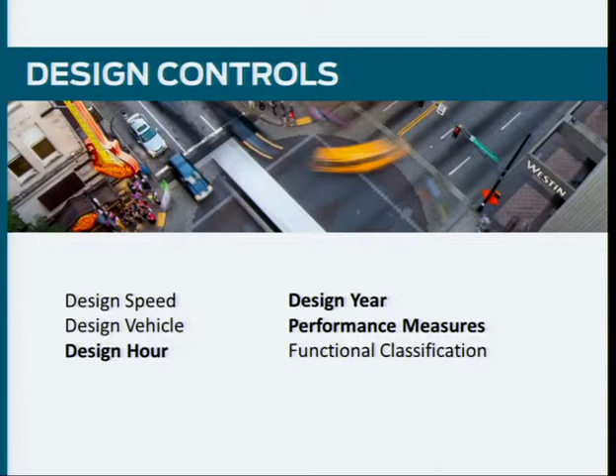Can you say that in cities? Why can't you say that in cities? There's a lot of various things—there's more obstacles, as the Green Book would say. Obstacles being trees, things that are in the way of that design vehicle. So clearly, from a speed standpoint, our needs in cities are much different than what you have in a rural or much more rural condition.

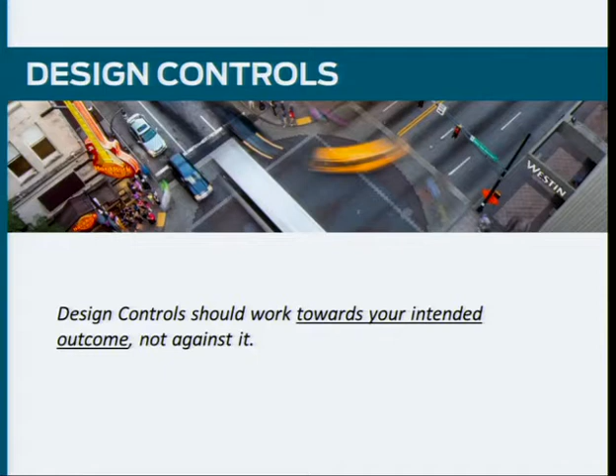The first point I want to make is design controls should work towards your intended outcome, not against it. If you think about it from a city standpoint, what's our number one goal in downtown Portland? It's to make it as friendly as possible to pedestrians. But above that, we want housing in downtown Portland—we want people to live and work there. So thinking about the nature of our streets, we don't want people to speed through them. We want our design controls to contribute to a safe environment for pedestrians and everybody downtown.

High-quality design for city streets and intersections relies on a keen understanding of the analytical processes and assumptions underlying those technical decisions that shape our streets. Some of you will know this answer, but what speed do we assume people drive in downtown Portland? It seems like a good speed—how fast can you drive in downtown Portland? For those of you who took my summer class, you can't answer. 12 miles an hour? Okay, that's close.

We're actually at 13 to 16 miles an hour in downtown Portland. How do we do that? It's because of the short space between intersections, and we've chosen that speed to make it as safe as possible. If we do have a crash, we want that crash to have as small an impact as possible on the people involved, whether a pedestrian, a bike, or two vehicles. So we try to manage those speeds the best we can and use signals to do that. Our design controls and assumptions are really trying to shape our streets to be as safe and hospitable as possible in downtown Portland.

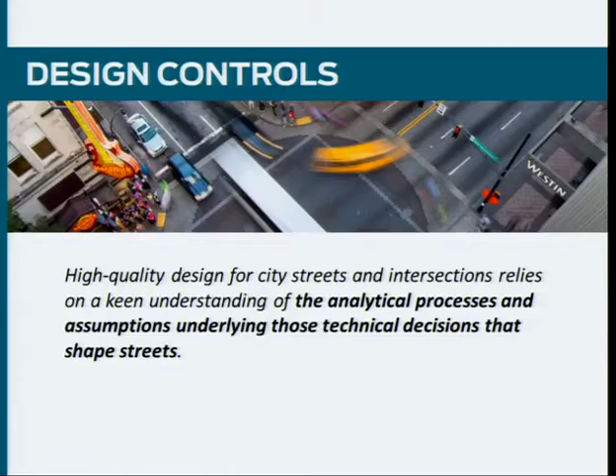So let's talk about design year—that's the big picture design year. What is our planning horizon? What's our planning horizon for most highway projects? Do we look at designing for tomorrow? Do we look at designing for next year?

20 years out, okay? 20 years out. So specific guidance right from the AASHTO Green Book: many highway engineers believe the maximum design period is in the range of 15 to 25 years.

As I started my career, I worked in the travel demand model, looked at the forecast, looked at historic growth, estimated the growth in a straight line estimate based on historic growth. What did I get? Oftentimes I'd get a doubling of traffic. A doubling of traffic, okay? So to accommodate that, you have to make the streets twice as wide, typically.

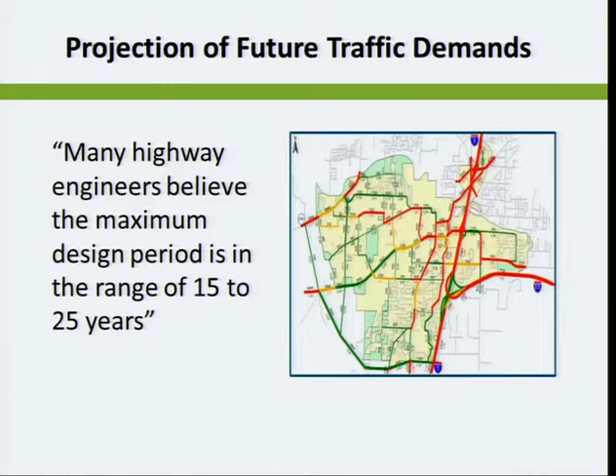In downtown Portland, if you look at the travel demand model, we don't have that same level of growth. So what's good in the rural or suburban cases that happened between 1970 and 2000 when I started my career, or thereabouts, is not what's happening today. The trend is different today, and that's what the Urban Street Design Guide talks about.

So we have to think about these straight line growths a little bit differently, perhaps. Maybe look at the actual data and change the historical perspectives on that straight line growth. Perhaps that straight line growth isn't going to hold in the next 20 years. So doing a careful consideration of what is it that we want our cities to look like, and how much vehicular traffic do we want to try to accommodate or encourage in our cities. That's a really important point.

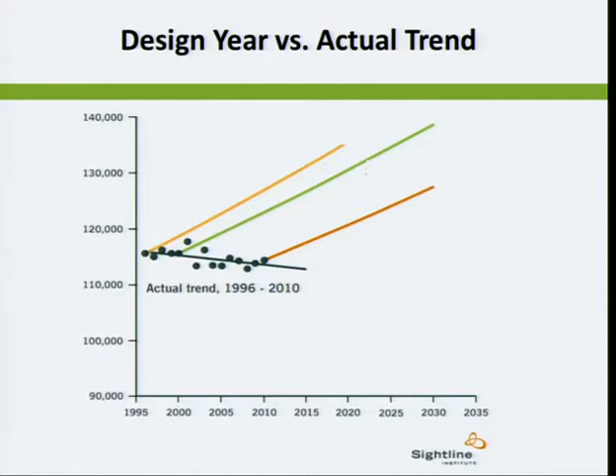This is data from the Sightline Institute, where they had a specific project where they kept updating those forecasts. They updated it 3 times over the length of the project, and that's what you see in those straight lines. Each time, those updates were straight line estimates. That's a very typical thing for engineers to do, is to consider a straight line growth based on historic patterns. Now what's happening is that trend is going downward, so you have to rethink that historic trend pattern.

So why is it that we're doing this? Well, we have an unconstrained growth. We've always wanted to try to accommodate that vehicle demand. We have to perhaps rethink that, go away from that straight line growth projection, and then think about the underlying goals. Are we just trying to do congestion reduction, or are we trying to be more careful with how we invest in our transportation system and think about how we use perhaps congestion in some ways as a policy, so that we encourage people to use public transit, to walk, to change where they're living. Those sorts of things are bigger picture questions that may or may not be appropriate for the city that you're working in.

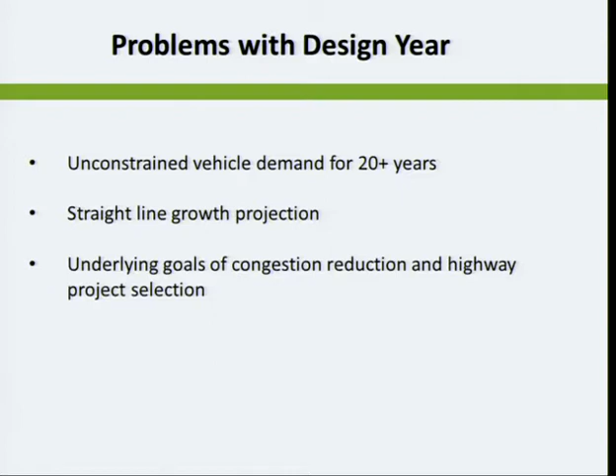But certainly, if you think about that today, Metro and the City of Portland and others at ODOT are working on a plan to figure out how do we rethink what this corridor is doing for the neighborhoods that are on the corridor. How do we use transit more effectively? How do we create a more functional walking space than what's there today? So that trend in Portland is happening on projects, but you see that trend happening slowly because certainly we only do that every 20 or 30 years on corridors like Barbur Boulevard.

Okay, so we looked at the big picture design year. I want to shift to the design hour. That's more in my realm as the signals and street lighting manager. I have to think about things on how it's working on a day-to-day basis, whether I need to make changes to the traffic signals, whether I need to think about whether we can accommodate or provide enough green time for the particular movements, and who I'm providing that time for.

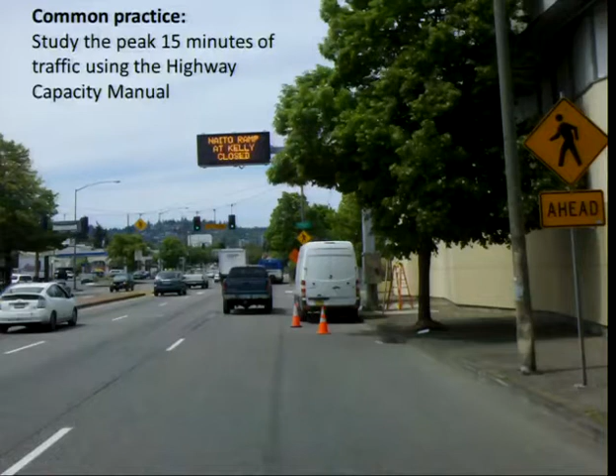Our common practice, and this isn't the AASHTO Green Book, this really comes from the Highway Capacity Manual, is to look at the peak 15 minutes of the entire day of traffic. So we look at vehicular traffic mostly, because that's on Powell Boulevard here as the example. That's what we see most people traveling as on Powell Boulevard. So Powell Boulevard really is indicative of any suburban sort of arterial where it's mobility-centric. In this case, one of the few in Portland that are 6 lanes wide and moving a lot of traffic.

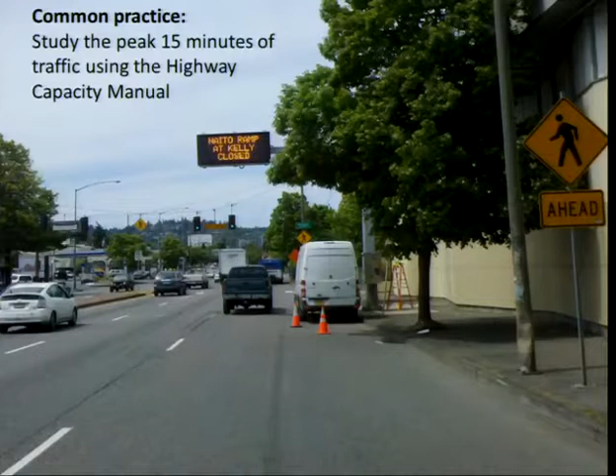So we study the peak 15 minutes in the Highway Capacity Manual as a way to determine whether we can accommodate traffic and make the delay for people that are using the facility as low as possible. And the NACTO guide talks about urban design as being the 30th highest hour. So considering the 30th highest hour, the representation of a daily peak hour. If you think about the 30th highest hour, well, let's start with the peak 15 minutes. If you think of the peak 15 minutes, what percentage of the day are we designing for?

Do some quick math: 24 hours in the day, four 15-minute periods. That's a little more than 1% of the day we're designing for. In what other line of business do we design for the peak 1% of a day? And then if you apply the peak, the 30th highest hour of the year on top of that, you're taking it further to designing for a small percentage of the time we'd have on the street.

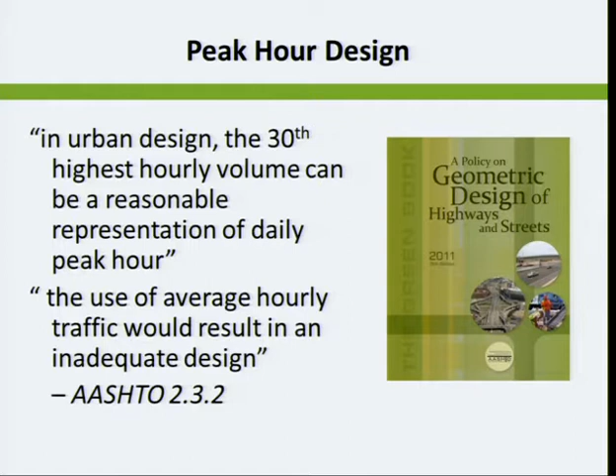That's something we've always done, always looked at it from that perspective. The NACTO Urban Street Design Guide thinks about this differently. It says look, we can't design for that peak 15 minutes, or maybe we don't want to everywhere. Maybe we want to think about multiple hours of the day, and think about how you're going to have some periods of congestion. Maybe you have an hour that's bad. That's kind of life in the big city.

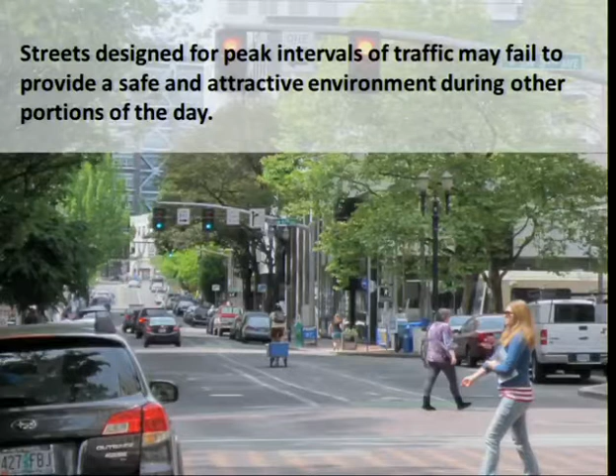15 minutes, it's going to be congested, but an hour, that's okay, so not to worry about that. And then think about the other times of the day. Streets designed for peak intervals of traffic, those 15-minute periods, may fail to provide a safe and attractive environment during other portions of the day. That's really key. It's thinking more broadly about the city and the street and how it functions throughout the entire day, a 24-hour existence of the street, as opposed to just trying to accommodate that peak 15 minutes of traffic. Quite a different look on it.

So the Urban Street Design Guide talks about what are the typical needs from 8 a.m. to 8 p.m. At 8 a.m. you may be focused on mobility, thinking about transit first, or moving cars. But at noon, maybe it's accessibility focused — you'll see that in downtown Portland, I'll get you some examples if I have time. But then at 8 p.m., when the city is maybe quieter from a traffic standpoint, thinking about other needs.

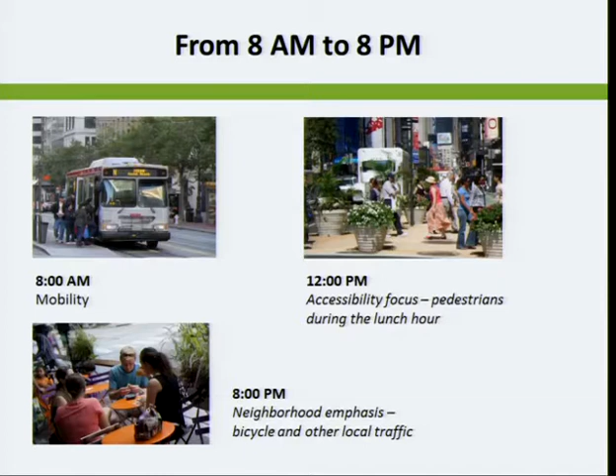That's something that as a signal engineer, we never really did before. We always just worried about the peak hour. We came up with traffic signal timing plans based on that peak hour, and we didn't really spend a lot of time on those other times of day.

So intersection design principles — getting into the details, we've got to think about streets again differently. How do you do that? Well, we have a six-point program for doing that. We want intersections that are as compact as possible. That example I showed you on Barbur Boulevard — that was not a compact intersection. That was a very sweeping right turn, not the safest environment for pedestrians.

We want to analyze systems, not intersections — I'll give you an example of that. Time and space, that's, of course, my realm with traffic signals. Thinking about intersections as shared spaces, utilizing excess space effectively, and then designing for the future.

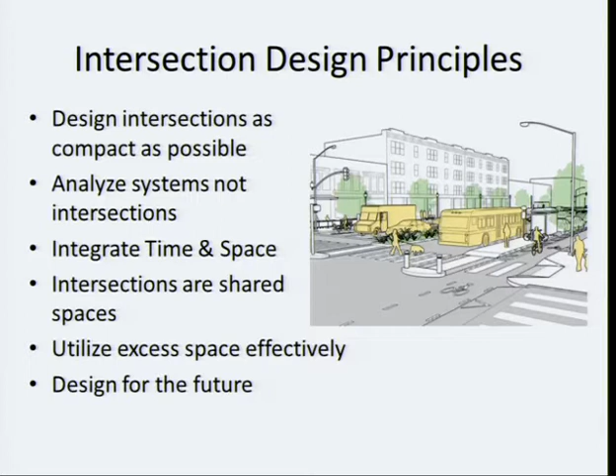So systems, not intersections, is really very important to me, and I'll get into the performance measures of why that is. But certainly, if you think about this particular intersection, if I look at just this traffic signal, and I'm doing my level best with all the green time that's there, maybe I don't have enough time to spare with everyone there. It shouldn't necessarily mean that I've failed. We've got to think about the system a little more broadly, and perhaps there's just other directions, other spots that they can use in the system.

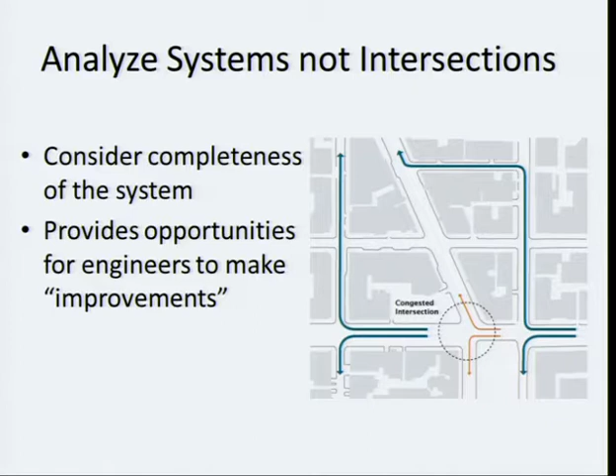And that goes to not only thinking about the system as opposed to one mode, thinking about it from a vehicle standpoint, but also thinking about it from a pedestrian standpoint as well, or a bike standpoint. Maybe this street is a good one for bikes, that we would want to accommodate that mode of traffic and make that as comfortable as possible.

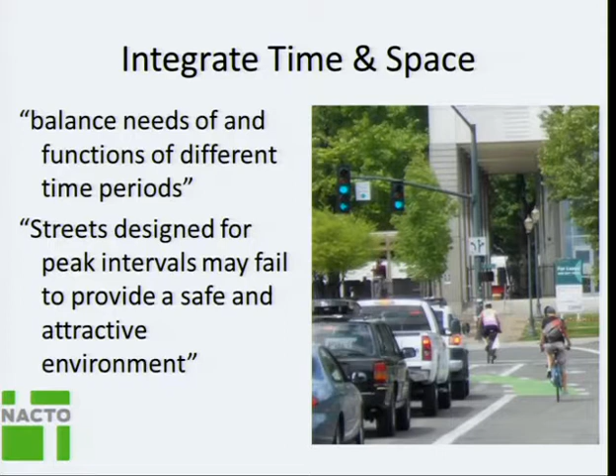So integrating time and space, that's where the signals — the NACTO guide talks about balancing needs and functions of different time periods. Again, streets designed for peak intervals may fail to provide a safe and attractive environment. We've got to think about those things differently.

Okay, last but not least, performance measures. What performance measures are we using in cities to try to guide our decisions in terms of investments?

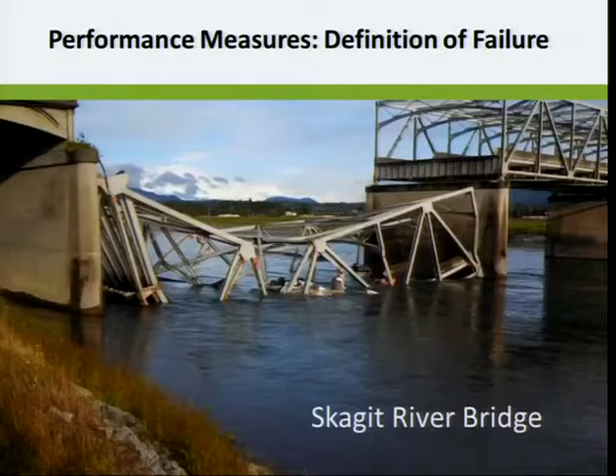Transportation is a little more subjective, and it depends on your community. I presented on this in my last seminar here at Portland State, about confessions of a traffic engineer. One confession is that our primary measure for identifying success is just seconds of delay per vehicle. If I was judged solely on that, I'd be failing all over the place. Downtown Portland cannot accommodate more cars than it already has.

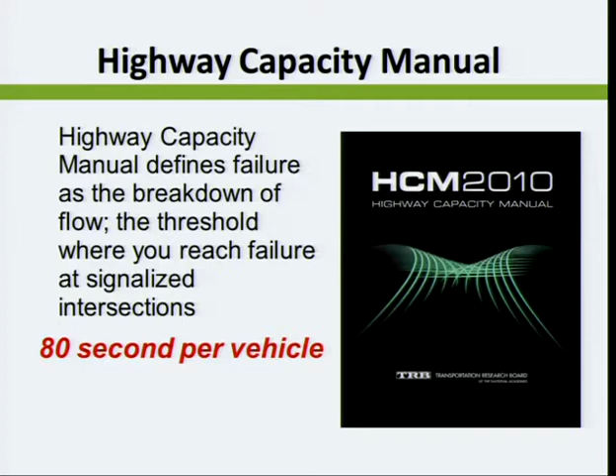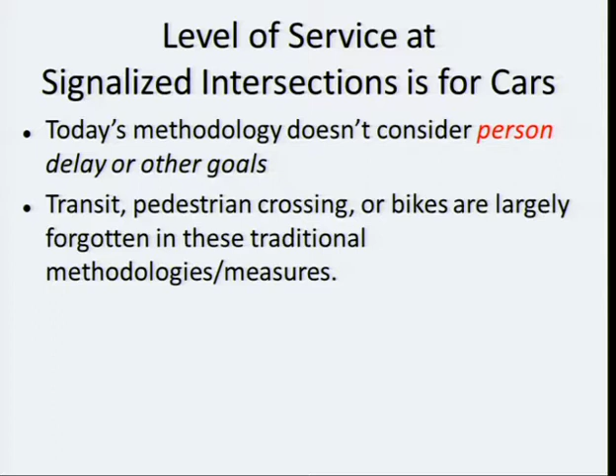So what is the right measure for downtown Portland? Thinking about it broadly means thinking about people, not just cars. So person delay, as opposed to just vehicle delay. We've done that with transit, moving people by bus and train, and prioritizing trains as they go through the city.

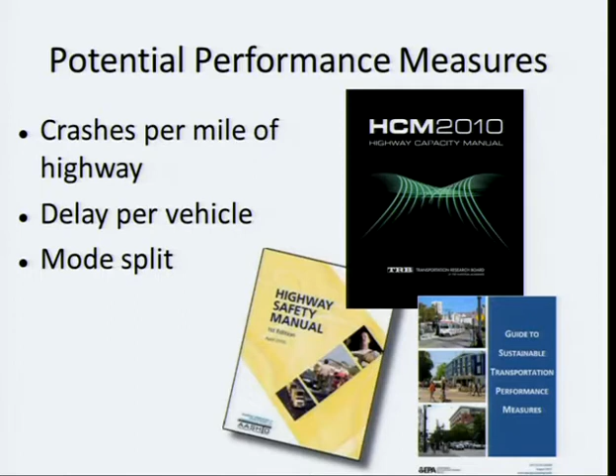In Portland, we've thought about this a lot over time. It's not just my work, but a lot of us at PBOT trying to figure out the right measure. Some of that's been recognized in work by Roger Geller and Greg Raisman and others at the city, tracking bicycle traffic and crashes over many years, showing a downward trend as more people ride over the bridges — a safety in numbers effect where the crash rate has gone down, which is really great news.

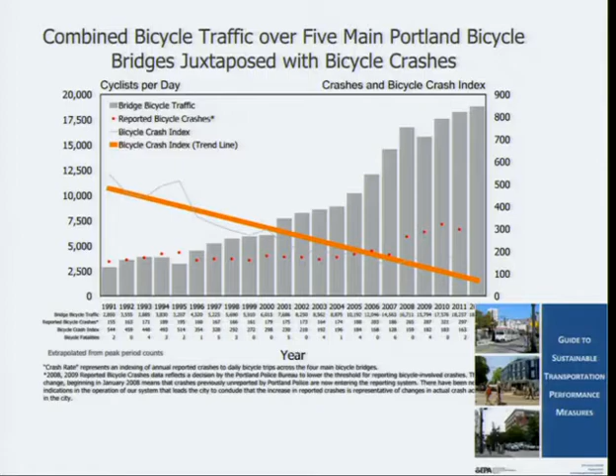It's really getting more people into downtown. From an economic development standpoint, we're doing our job as transportation professionals to make the city more vibrant and work better. That's represented in the Guide to Sustainable Transportation Performance Measures, co-produced by the EPA and Federal Highway Administration.

This is a real live example in Northwest Portland — Northwest Broadway, as you come over the Broadway Bridge. Great picture from Jonathan Maus, Bike Portland, during our AM peak hour. If you look at that picture by mode, how many cars do you see? Nine. How many bikes? Over twenty. So if getting people into downtown is the measure, right now we've provided about 6 or 7 feet for the bike lane and 24 feet for cars.

So we're getting to the point of asking: is the signal going to fail for cars? Do I have 80 seconds of delay for cars there? No — so I'm doing my job right, I'm winning? No, that's not the right metric. I need to think about people delay. Luckily in this picture, I think everybody got through the signal, including all the bikes in the line.

So thinking about performance measures by mode, you can also aggregate that up to people delay. New York City has done great work on this, considering a broad range of measures I'd never thought about as an engineer — that's why cities talking to cities is really fantastic.

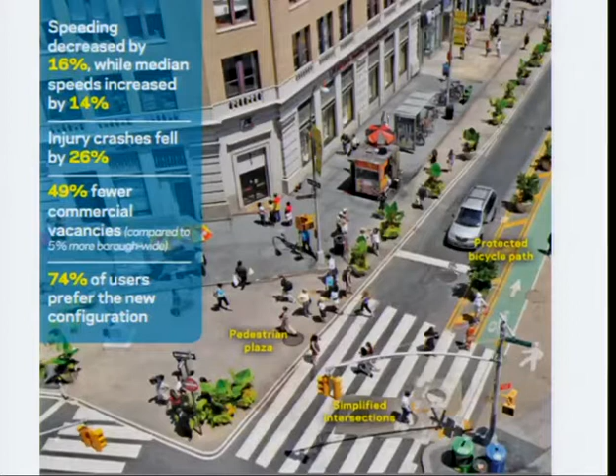One of their measures was speed decrease — how much did speed decrease on the street, and median speed, along with injury crashes falling. That's fantastic information to have. They've also gathered data on commercial vacancies and done a lot of polling to figure out: do people like what we've done? Are they willing to pay for that? Are they seeing more sales along the corridor where these improvements happen? It's really fantastic to see new measures being used by engineers and planners alike.

So the takeaway I hope you'll take from all this is to apply the Urban Street Design Guide by challenging those assumptions. Is the question we're asking the right one — person delay versus vehicle delay, or should it be economic development or other things? All those things roll down to engineering details we apply as practitioners, and going up one more level, to the planning forecast — thinking broadly about what we're trying to accommodate and what our future will look like.

So use policies to change traditional transportation practices. With that, I'll thank you for your time, and I'll open it up to questions.

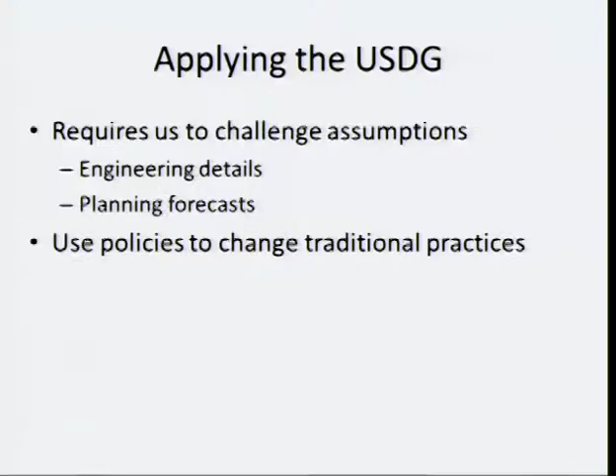Just looking at that photo of the bicycle, with the City Club's report that came out last year saying the city needs to start designing more appropriately for bikes - was this taken into account, or was it already underway with this report, what you've done here with the NACTO thing? Was that before the City Club report, or did the City Club report have any impact on this?

No, really two parallel processes. The NACTO work was done at the national level, led in part by the New York City DOT, which has been a great sponsor of NACTO and really driving a lot of that process. But other cities like Boston and Chicago have also been good voices for making this transition happen, helping bring design details into a written format you can leaf through.

I should say that the Urban Street Design Guide is available in bookstores through Island Press, or also online. About 95% of it is freely available just by clicking through the NACTO website. If you Google Urban Street Design Guide, you'll find all of what I've talked about and more in the online format.

When the design guide gets updated in the future, what should it include, or is it perfect as it is right now? That's the big picture research question, right? More research is always necessary. Clearly there's more detail that can be put into it - we really scratched the surface.